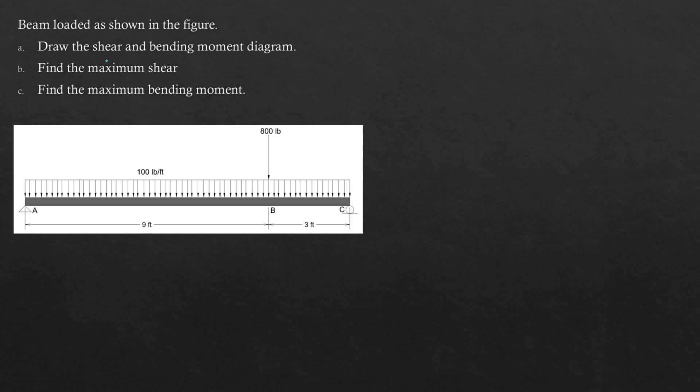So before natin ma-draw yung shear and bending moment diagram, kunin muna natin yung reactions dito sa beam natin. So dito sa may A, RA. Summation of moment at A is equal to 0,

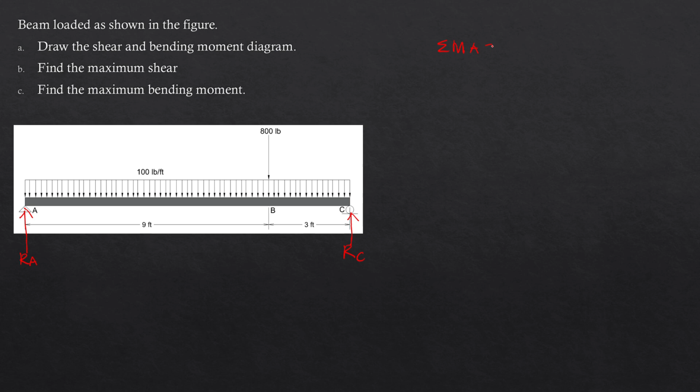counterclockwise yung assumption natin which is positive. RC, punta sa A, so 12 yung distance niya, minus, ito yung uniformly distributed natin na 100 pound per foot, so clockwise yung ikot niya, yung assumption naman natin is positive, kaya ito ay negative. So that is 100 times 12.

And then, yung distance niya, yung resultant, nag-act lang naman sa gitna. Yung distance niya hanggang dito sa may A, kalahati. So 1/2 ng 12 ay 6. So times 6. And then itong 800, point load natin, yung ikot niya is clockwise. So minus 800, and yung distance niya from point load hanggang A is 9 feet. So times 9 is equal to 0.

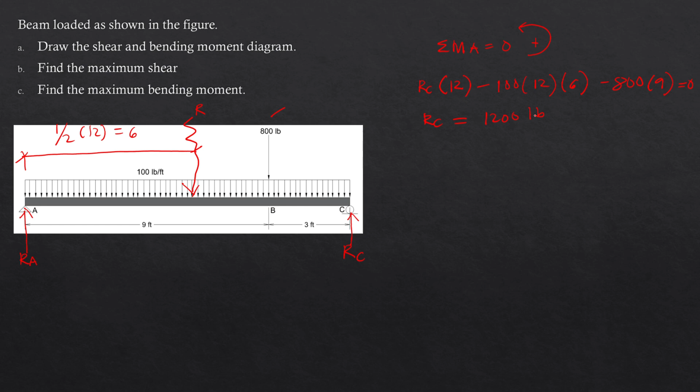So compute. Reaction sa C is equal to 1,200 pound. Yan yung vertical reaction natin dito sa point C. And then next is reaction sa A. Pwede natin gamitin yung summation of forces vertical is equal to 0, and upward yung assumption natin is positive.

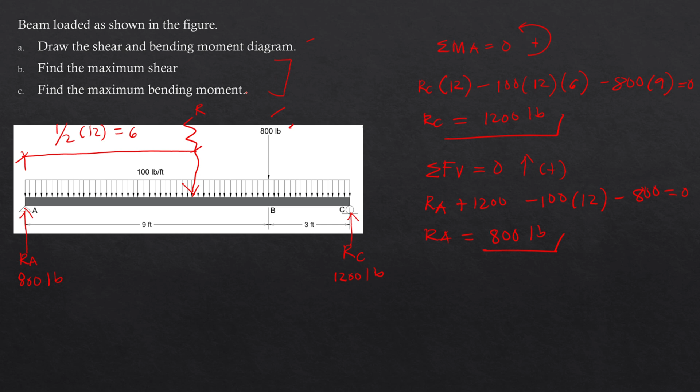So RA plus 1,200, and then uniformly distributed load sa beam na 100 pound per foot times 12, and then minus 800 na point load is equal to 0. So yung reaction sa A is equal to 800 pound. Nakuha na natin yung mga reactions sa A and sa C. So pwede na nating i-draw yung shear and bending moment diagram para makuha natin itong B at C, yung maximum shear and bending moment. Next slide lang tayo.

Dito, lagay lang natin 800 pound sa A, and dito sa C is 1,200 pound. Palitan lang natin ng kulay. Una, i-draw natin yung shear diagram. Start tayo from 0, and meron tayong reaction na 800 pound, which is upward, so pataas, 800. And then pupunta tayo sa point B, and may madadaanan tayo na 100 pound per foot na uniformly distributed load, and ang span niya is 9 feet.

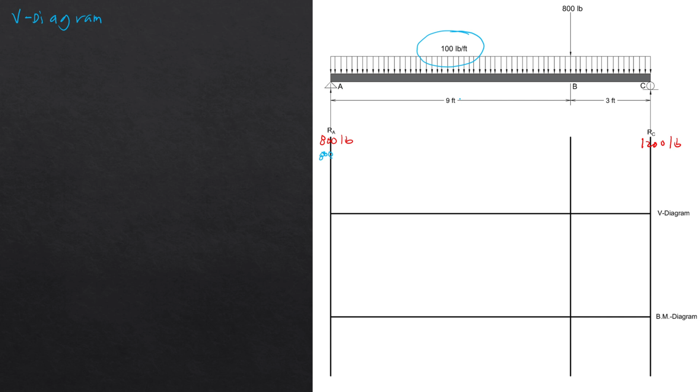So 800 pound minus, kasi nag-act siya downward, 100 times 9. So 800 minus 100 times 9 is negative 100 pound. From 800, pupunta tayo sa negative 100. And then dito sa point B, meron pang point load na nag-act downward. So negative 100 minus 800 is equal to negative 900 pound. Straight line yan, first degree. Baba tayo ng negative 900 pound.

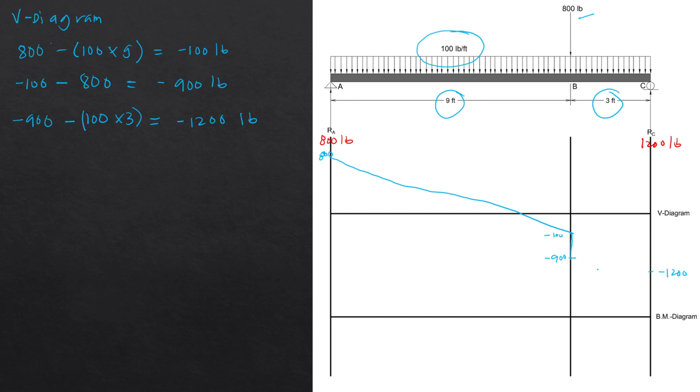And then biyahe tayo from point B punta sa point C, may madadaanan tayo ulit na 100 pound per foot, which is 3 feet yung span niya. So negative 900 pound minus 100 times 3 is equal to negative 1,200 pound. From point B, baba tayo ng negative 1,200. So paslant yan. Negative 1,200 pound.

And then dito sa C, meron tayong upward na reaction, 1,200 pound. Upward, so i-add natin. Negative 1,200 plus 1,200 pound is equal to 0. Napag-zero natin yung shear diagram natin. So next tayo, bending moment diagram. Ito na lang, green.

Ito is first degree, and first degree din to. Kunin muna natin yung distance: x, and then 9 minus x. Gamitin natin yung ratio and proportion. So x over 800 is equal to 9 minus x over 100. So x is 8 feet. And 9 minus x is 1 foot.

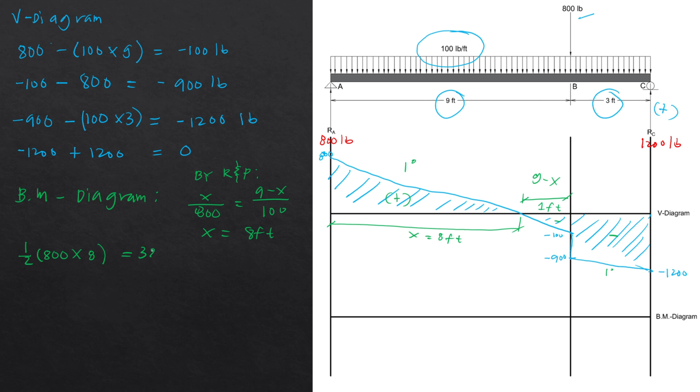So area method yung gagamitin natin. Ito is positive, and then negative, and negative. So 1/2 ng 800 times 8 feet is 3,200 pound foot. From 0, wala namang nag-a-act na moment dito sa A, so start tayo sa 0. And then punta tayo dito, 3,200 pound foot.

And then minus natin 1/2 ng 100 times 1, is equal to 3,150 pound foot. Punta tayo dito, 3,150 pound foot. And then minus ulit natin. Itong shape na to is trapezoid, and ang area ng trapezoid ay B1 plus B2 over 2 times the height. So 900 plus 1,200 divided by 2 times 3 feet is equal to 0. Napag-0 natin yung moment natin.

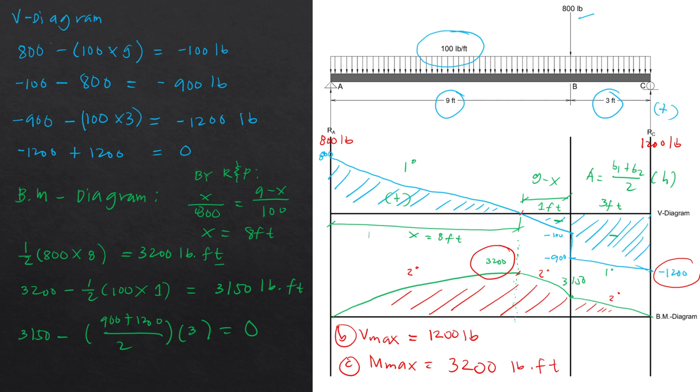Maximum shear and maximum bending moment. Yung maximum shear natin is negative 1,200, absolute value lang naman yan. So letter B, V max or the maximum shear, is 1,200 pound. And the maximum moment, M max, binilugan na natin, 3,200 pound foot. Yung maximum moment natin is nandito sa zero shear, which is 3,200 pound foot. So yan yung mga sagot natin for this sample problem.